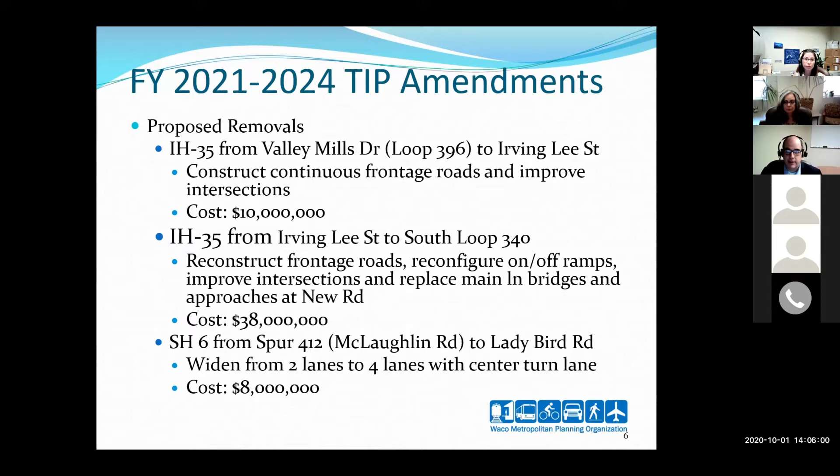The big conversation at the policy board level involved the mall-to-mall project. There's been a lot of effort on the part of the district and the city of Waco to get that project ready for construction toward the end of fiscal year 21. The other discussion was about providing an incentive to expedite the construction phase.

During the conversation last month, it was believed that 10% was an appropriate figure, which would be about $4.4 million added onto the $44 million construction cost.

Then there are two projects that the policy board was adamant are very important, and that if there's any way for these to continue remaining in the TIP, we need to explore those options. The first is the Highway 31 overpasses at FM 2311 and FM 939. The second is the FM 2113, or Spring Valley Road, project in the city of Hewitt.

The map showing these projects shows basically what's changing. The projects in red are the ones being removed from the TIP, but they're actually being programmed for a calendar year beyond the 4-year timeframe of this document. The one in orange is the mall-to-mall project, which would actually be moving forward by 2 years. The projects in green are unchanged from the previous programming we adopted back in June.

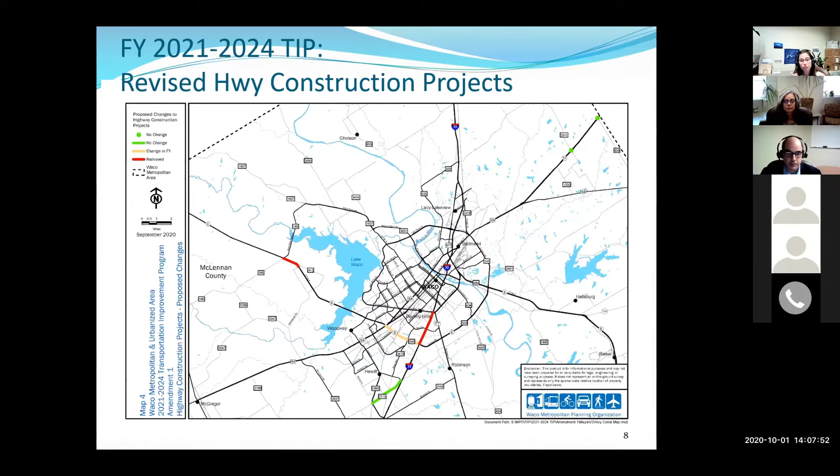Then we have to talk about Appendix D. So the projects that we're removing from the TIP, we still have an interest in moving forward with those at some point in the future. But in order to receive environmental clearance, we have to make some type of commitment that we would agree to fund these projects when funds are made available. We accomplish this through our Appendix D.

We would be adding in this amendment the Highway 6 project out towards McLaughlin Road and the full section of Interstate 35, the 4C phase, to Appendix D, since at some point in the future we are interested in moving forward with that, although it may be further out than we're initially thinking. Looking at the map, we'll be adding those two phases to several other projects already identified in Appendix D. There will be no changes to those other projects, however.

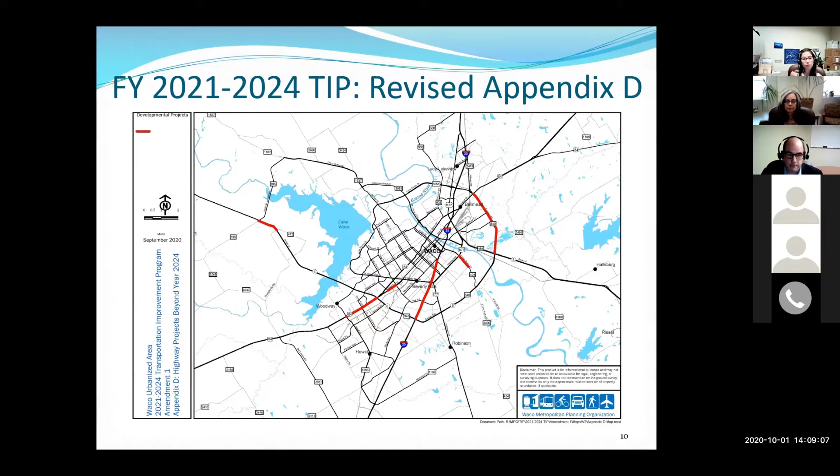Okay, so we are interrupting this technical committee meeting to bring you some breaking news that has come to our attention over the last 48 hours. Unfortunately on a Zoom call, I can't hear your responses because you're on mute. Hopefully this is okay.

About a little less than 48 hours ago, we did get some guidance from the Transportation Planning and Programming Division about the timing of the proposed 2021 to 2024 STIP. The bottom line, in big, bold, red, is that the draft STIP is probably not going to be moved forward or presented to the Commission for approval until March of next year.

Now that has some implications for some other work identified beyond just the highway projects, most notably our transit operations. Those dollars, which were already identified in the previous STIP, TxDOT is still going to let those projects move forward as they were identified in the previous document. That's going to continue to allow Waco Transit to obligate the operational dollars they need to continue operating their services.

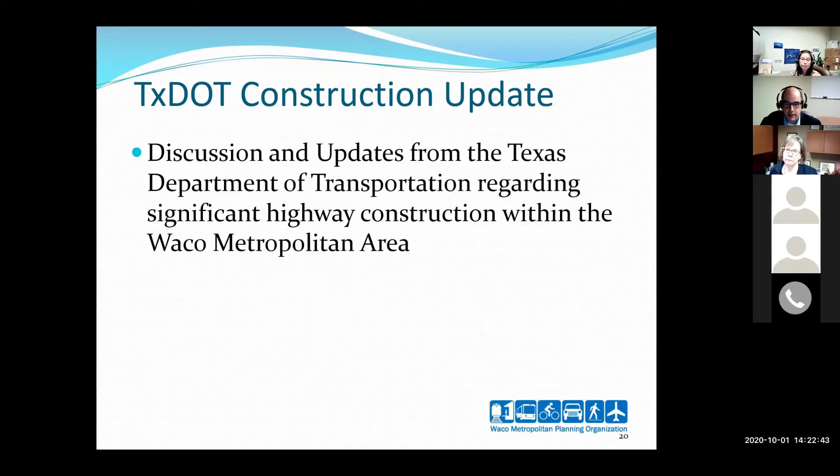All right, if there's nothing else on that topic, I'm going to move on to Clayton with his construction updates. Clayton, the show is yours.

All right, can you hear me? Yes, sir.

All right, our first project, the Hewitt Drive sidewalk project. Most of the sidewalk is completed along Hewitt Drive. Contractors are working down Panther Way. We should start signal work later this year, early part of next, and wrap up the entire project next summer.

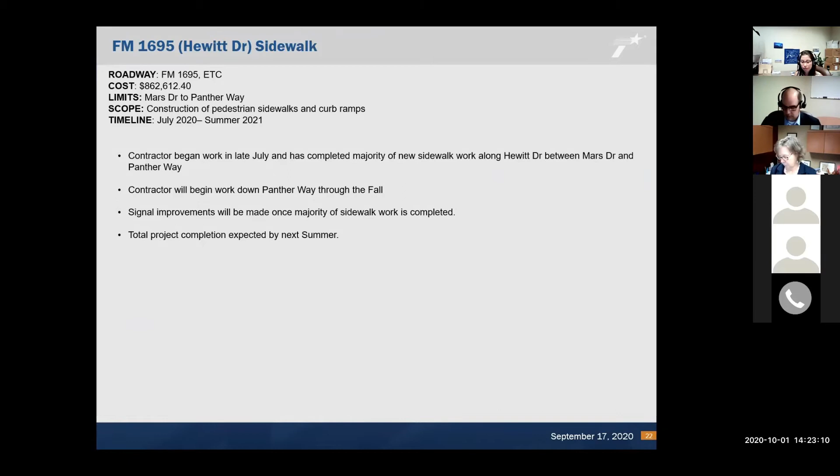1637 Phase 3 is another project getting close for us. We should wrap up our final surface pavement this week. We're working with Oncor to get the signal turned on at Bob Johnson, hopefully this month. The project will be striped end of October and we'll be totally out of there by November.

So 4B, I guess, Chelsea, if you want to turn control over to me. We've got a presentation of drone photos. This has been shown at the policy board, but not here. So let's see.

Okay, can everybody see that? Yes, now we can.

Okay, this is at the north end of the project, looking north. On the left side of the screen, the southbound frontage road's been completed. We've got bond breakers for the new southbound main lanes, and we'll be paving that starting this week and next. The bottom of the picture is going to be the new Behrens overpass, and we should be setting beams there tonight. On the right side, you can see newly constructed concrete pavement for the northbound frontage road, going up towards Walmart.

From our north there, we have just wrapped up our drainage work, should be finishing subgrade and asphalt bond breaker, then paving it the end of October as well.

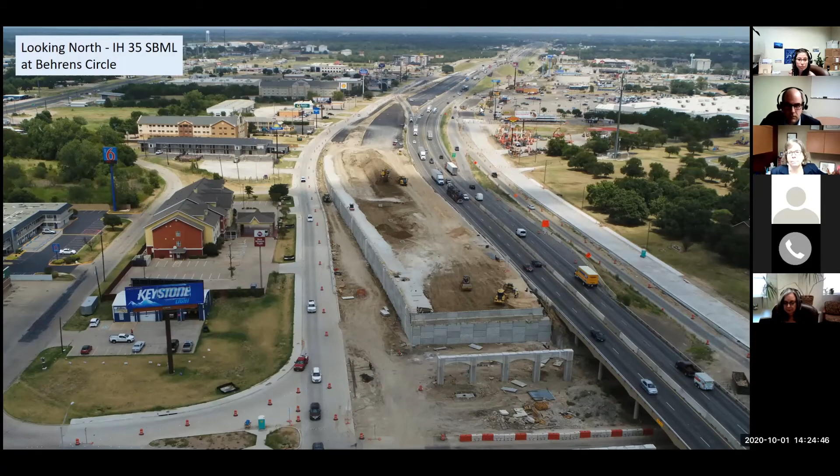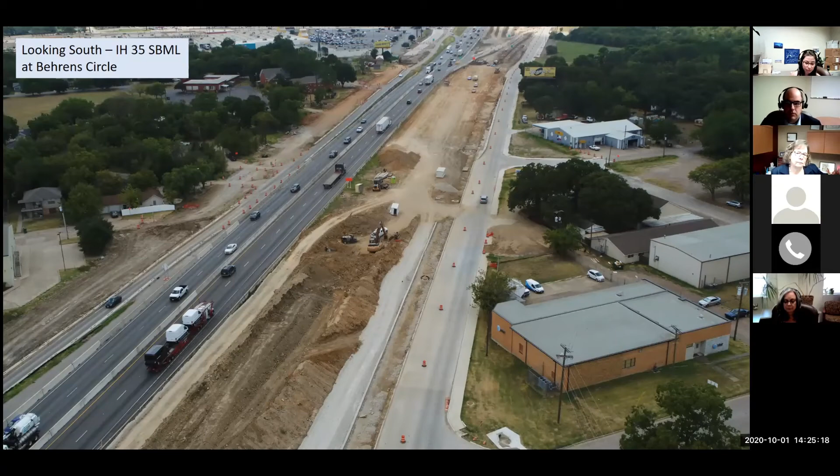Okay, this next slide is looking south from Behrens Circle towards 84. Again, you can see the newly completed southbound frontage road on the right side of the screen. It should be paved towards the end of October as well. On the left-hand side, subgrade work is going on for the new northbound frontage road.

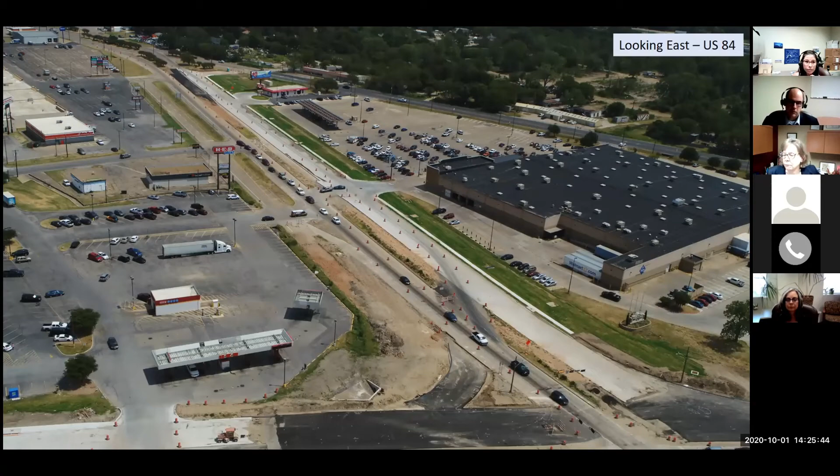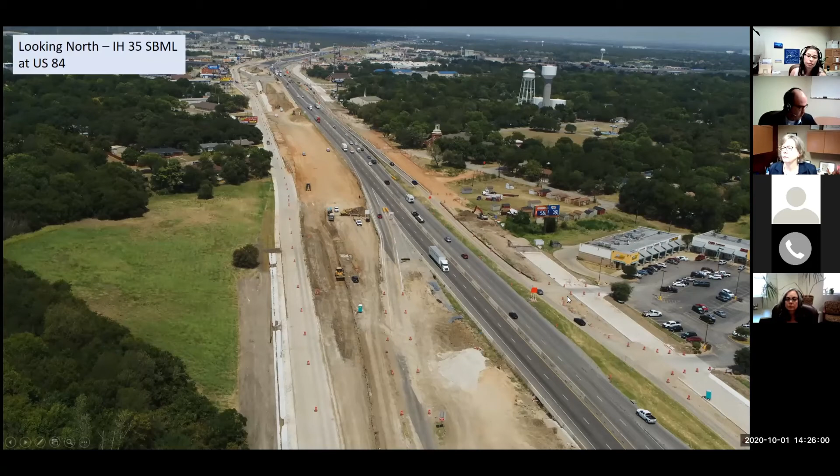All right, this is looking north from 84, another view of the subgrade work I mentioned earlier. Again, you can see on the right side the frontage road portion that's been paved, and subgrade work continuing on to the north.

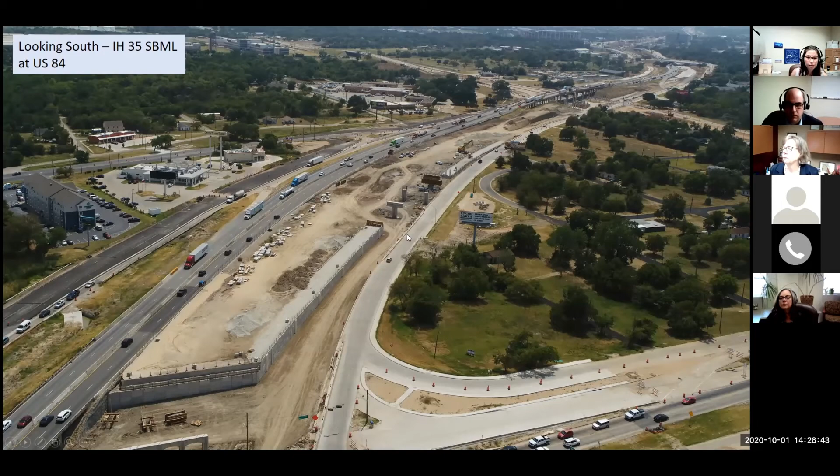About in the middle of the page, you can see a ramp coming together. We'll be next to Business 77, along with an entrance ramp that crosses underneath it to get on the new southbound main lanes.

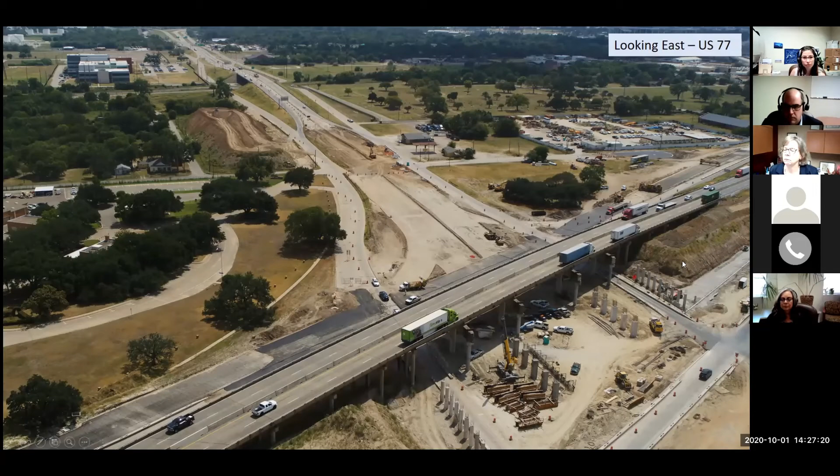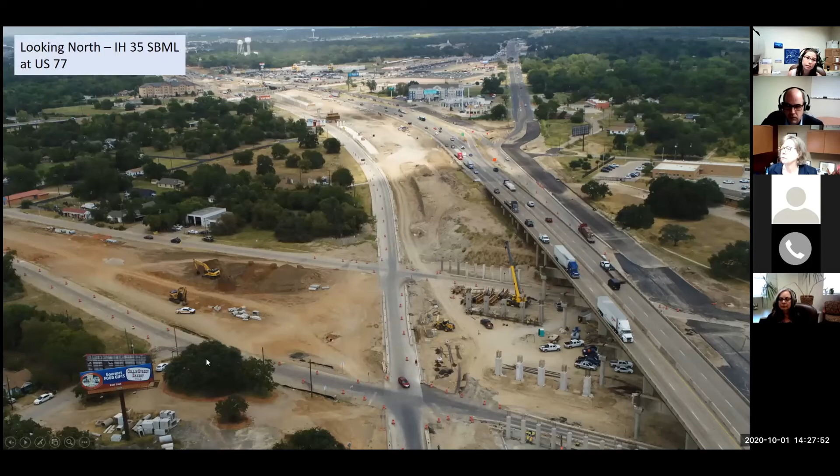Now this is from the Business 77 intersection looking to the north. This is the 4th Street overpass, you can see the top of the page. Work's wrapping up on the left-hand side there. We expect having this overpass go in October, early part of November, along with the rest of this newly constructed northbound frontage road up to 84. On the right-hand side, you can see some of the new southbound main lane concrete pavement that's been completed.

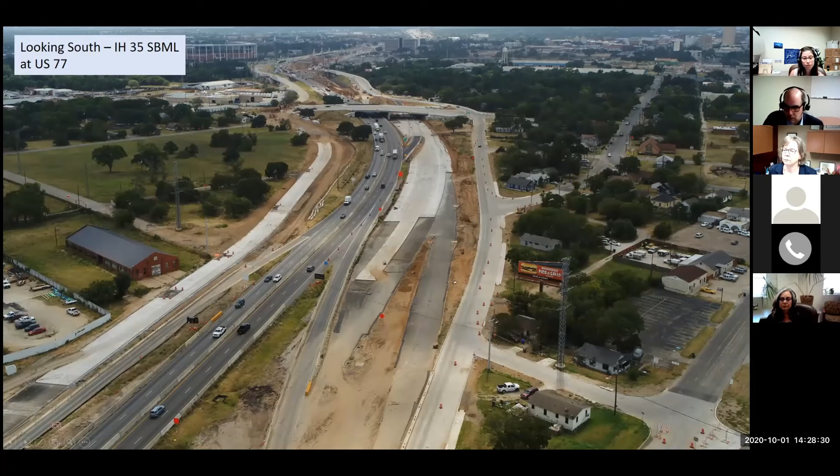This is directly above the 4th Street overpass. You can see we've got substructure completed for the railroad overpass. Since this picture was taken, we've actually set beams over the railroad tracks, setting panels, and are on schedule for that bridge here in October.

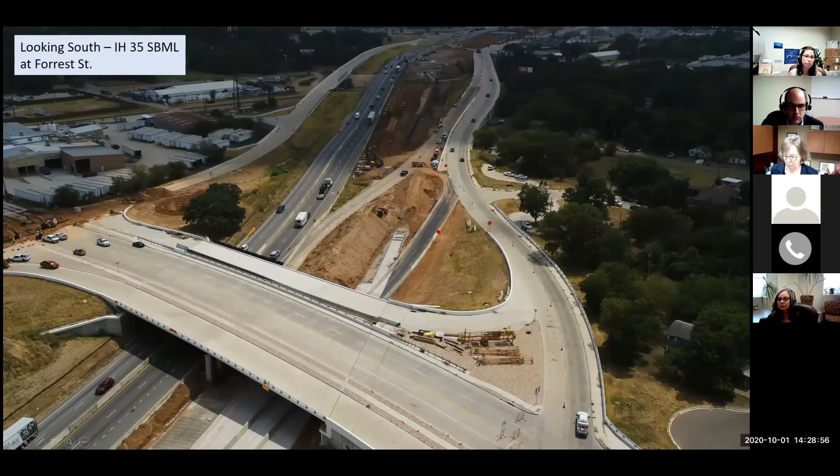There's another view of the bridge over the railroad pass. There's been a lot of retaining wall work in this area, and you should see more ongoing over the next month. Probably sometime in November, permanent pavement will be placed for the southbound main lanes in this area.

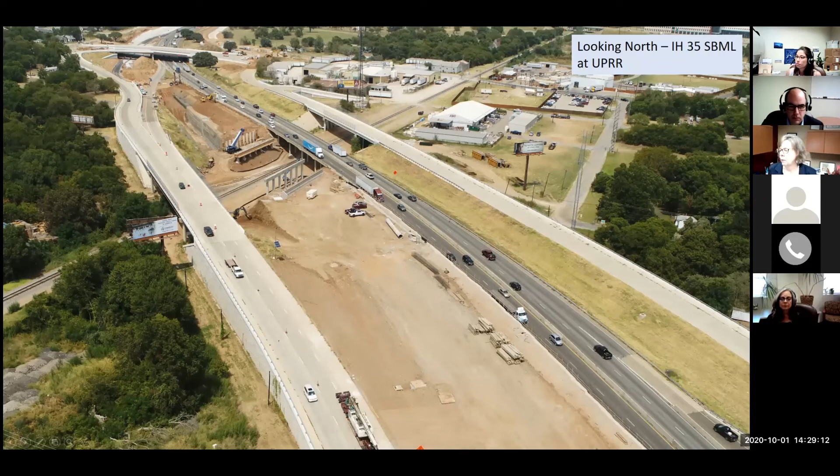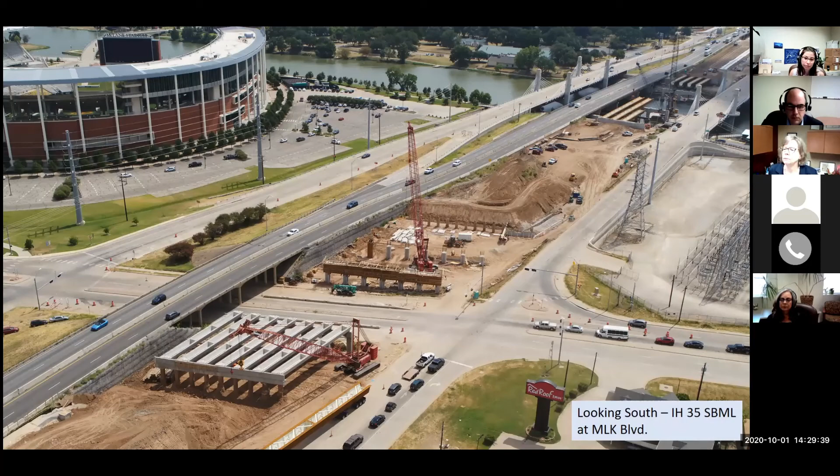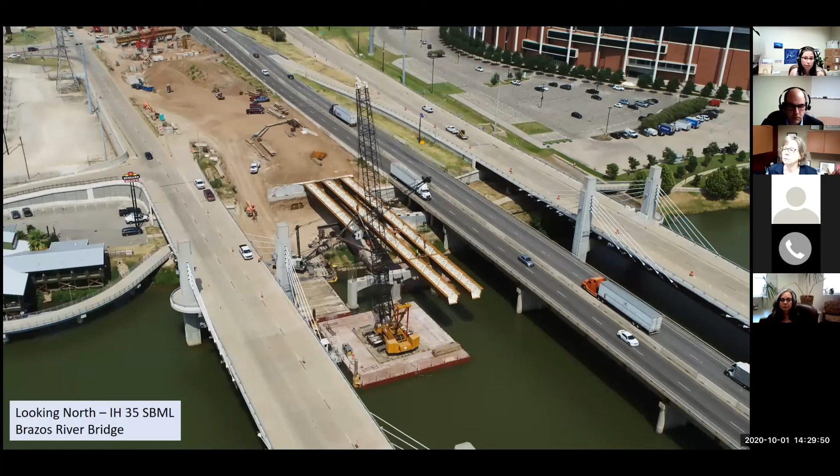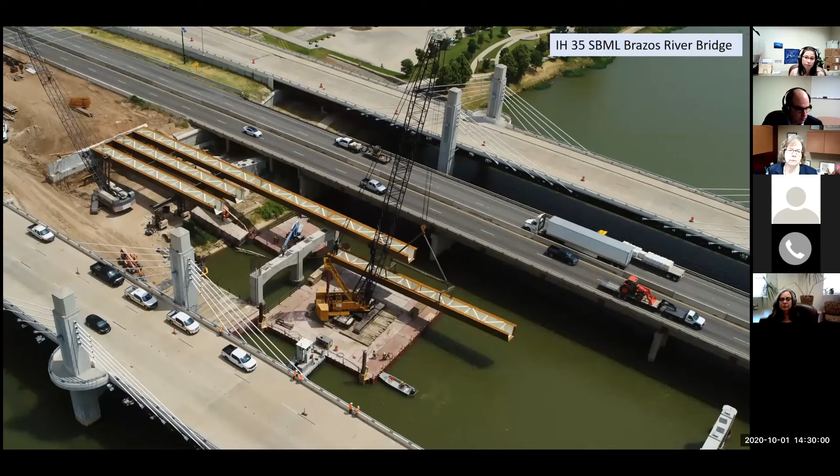Here's some photos of the steel beams that were set over the Brazos. That's been completed to date, and we're starting deck work, but here's a couple of good pictures. Here's one with the tugboat pulling the barge into place to set the drop-in section of the beam. Here's one from above the crane, so you can see just how steep the pick was for that steel beam.

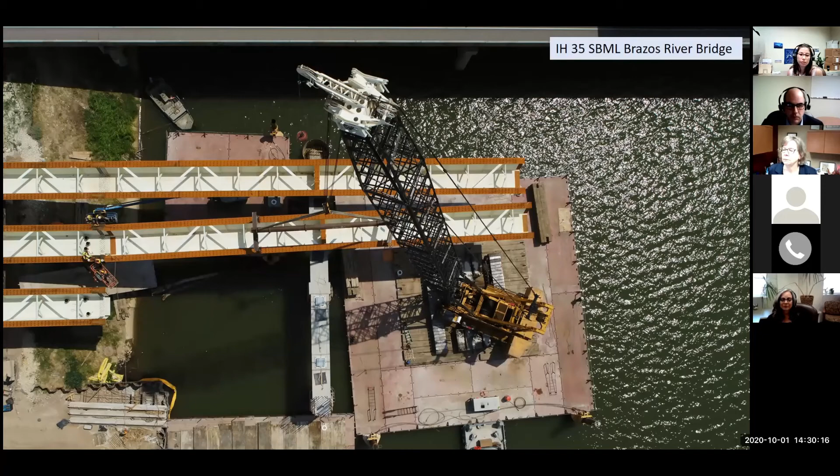Here's another picture of our beam setting operation.

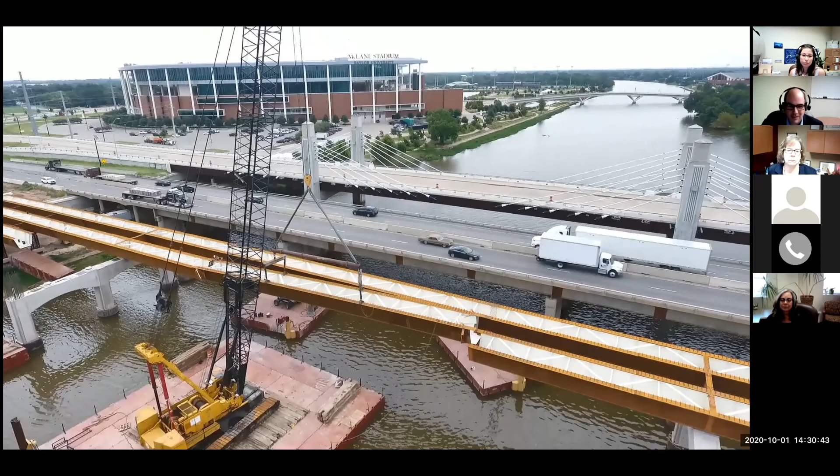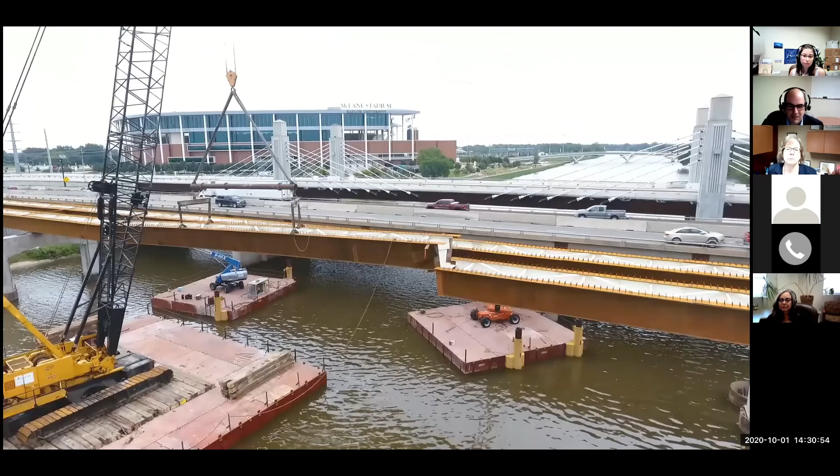Here's a little video, I didn't get this to work last time. Here's pretty good visual progress there.

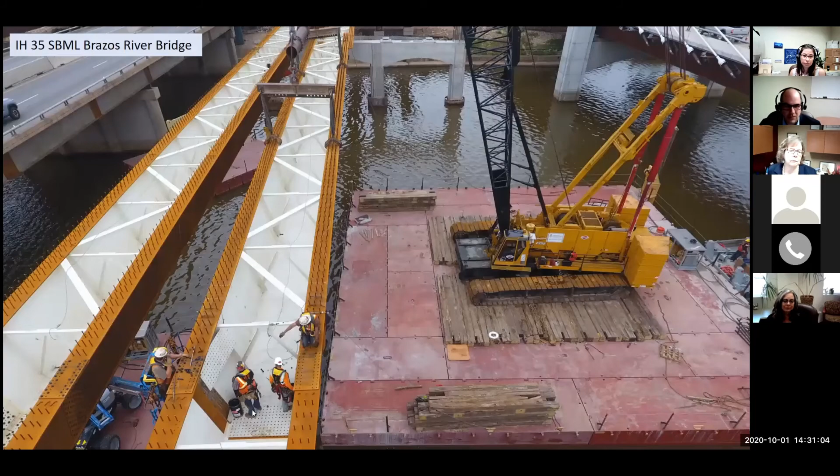Again, here's workers installing the splice plates and bolts for connecting the drop-in sections for these structures. This has now been completed since these pictures were taken. Good overhead view.

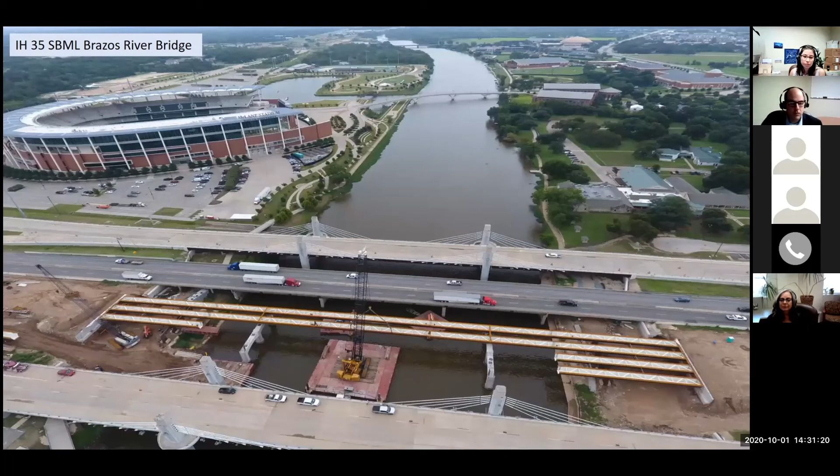You can see on the right-hand side of the page, we've done some concrete work for the northbound frontage road and University Parks intersection. We've actually placed some more pavement there. We anticipate opening that little piece of the frontage road and right turn lane hopefully later this month, and it'll open up the side lane.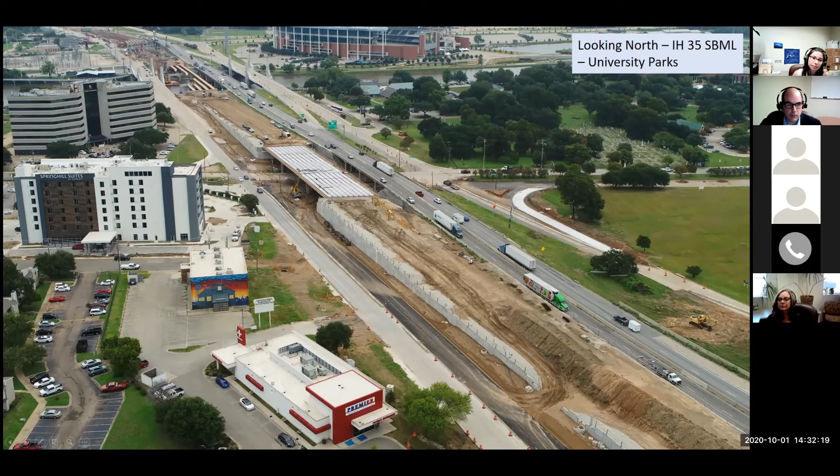Here's an overhead view of the 4th Street overpass, which has been placed. Again, retaining wall work is ongoing here in front of these businesses. Something to mention at the bottom of this page: 4th Street will be closing at the southbound frontage road beginning next week for approximately 3 months to do some waterline work and pavement work. But we are going to open 4th Street to two-way traffic from this work back to Clay Avenue to allow for local access to the apartment complex and businesses there. On the left-hand side, you can see where the northbound frontage road has subgrade work going on.

Again, we hope to have pavement going on the ground by the end of October in this area.

Clayton, real quick, that's 5th Street you'll be opening to two-way, correct? No, sir, it's actually 4th. Okay, so it's 5th Street that gets closed? No, 4th Street will be closed just at the intersection, from the southbound frontage road to the first driveway into the CVS or In-N-Out parking lot. So that area will be closed. If you want to get to 4th Street from the southbound frontage road, you'll take the 4th, 5th exit, then turn right at University Parks to Clay Avenue. Oh, I see. And then at Clay, you'll be able to turn left onto 4th Street and access the apartment complex or get down to In-N-Out. Ah, got it. Thanks, sir.

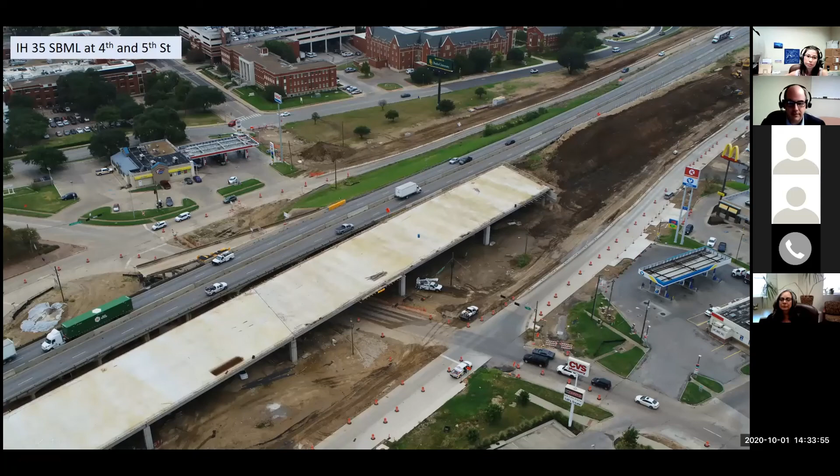Okay, and this is from the south end of the project looking north. Again, you can see the completed bridge. Since this has been taken, a lot of retaining wall work has been ongoing to the south. Crews have currently poured half of the 8th Street intersection here. We hope to have it fully constructed and opened up by the end of next week. 6th Street was poured and reopened on permanent pavement, and we should be working on 7th as soon as 8th Street gets reopened. Right now, we're projecting to have all of these side streets reopened prior to Thanksgiving in this area, so that'll be a big benefit down here.

And then again, to the right of the page, the ongoing subgrade work for the northbound frontage road, which again, we hope to be paving later in October.

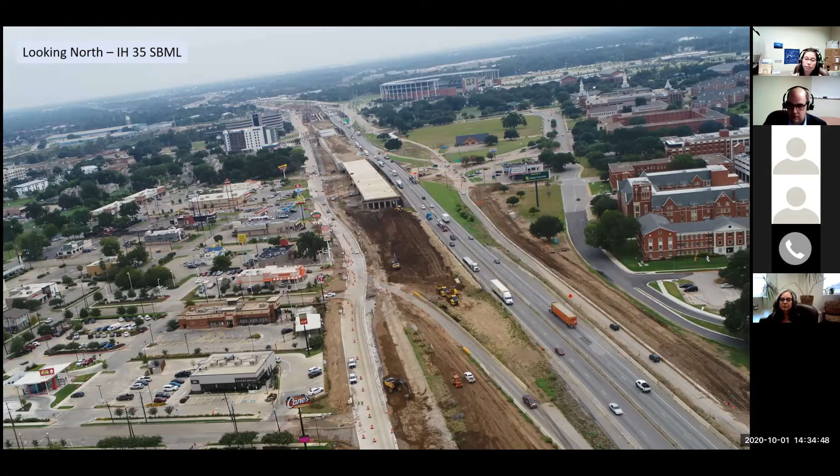On the left-hand side of the page is the 16th Street area. Again, hope that by the end of October, we have 16th Street in this northbound connection, get that area cleaned up.

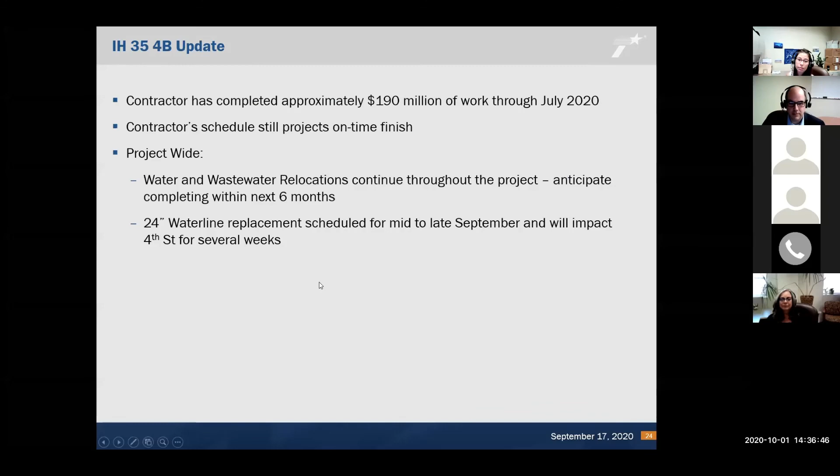Okay, so our next technical committee meeting is November 5th. We'll have the revised TIP amendments. Actually, I think these are the revised TIP amendments we're going to present to you, and hopefully they won't be further revised between now and then, but it's always a possibility. The Waco District is going to have a draft transportation systems management and operation plan they'd like to present to you. MPO staff and several of you on the technical committee have been part of that process, and we're looking forward to seeing some of their recommendations. A lot of those recommendations will probably eventually find their way into our Metropolitan Transportation Plan and eventually our TIP as well. And then, of course, we'll continue our conversation about significant highway construction that's been going on.

So we are continuing with virtual meetings at least through the end of this year. We're probably also looking at the first quarter of next year continuing virtual meetings, and maybe for some time after that. But when we're ready to, or when the state is ready to transition to something a bit different, we'll certainly keep you up to speed on that.